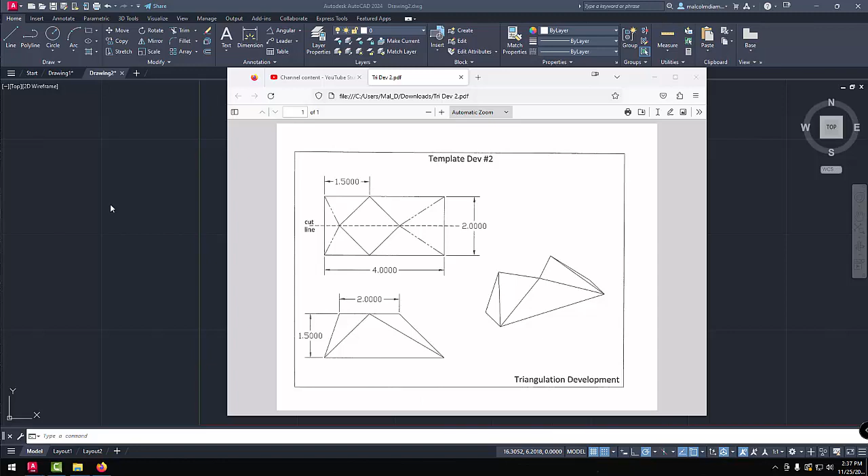Hi, and welcome to template development number 2 in Triangulation Development. As you can see on screen, this one's a little bit more difficult with an offset center. We've got the same half pattern design, and if I just move this to one side, we can start with the drawing.

First things first, we have a base which is 2 inches by 4 inches, so we could start with that. If we click on the rectangle, we come down on screen and left click. It's 4 inches by 2 inches, so it's at 4,2 and enter, and that's the start of our pattern.

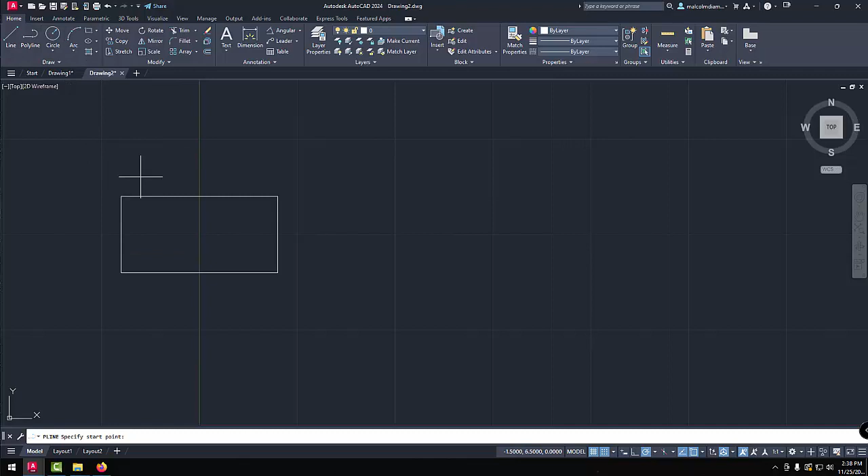Flicking the drawing back on screen for a second, we have an offset of 1.5 inches to start this square. What I'm going to do is bring a polyline up, come to this corner, then go 1, 2, 3 across. At that point, if I click it, because the end point is on, it's going to grab that corner, so I'll do NEA and enter, which gives me the near point right where I'm at, 1.5 inches in from the left hand side. That's our first start.

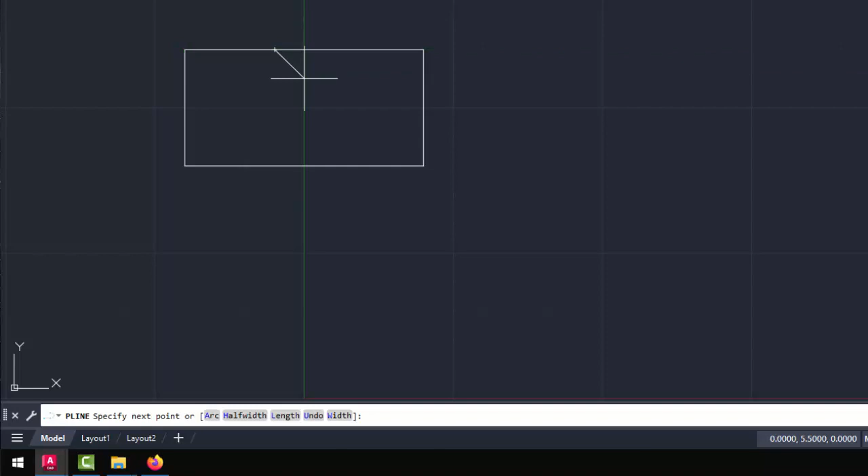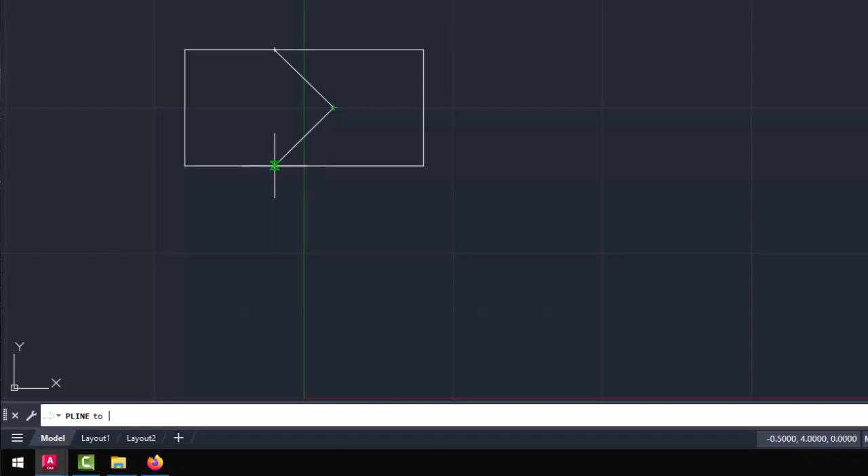Now we're going to trace around this by going 1 inch across and 1 inch down, click, 1 inch down and 1 inch back, click. Then we'll do an NEA, then enter, then click, 1 inch up and 1 inch back, and click, then we can do a C for close, C and enter, and that gives us our pattern.

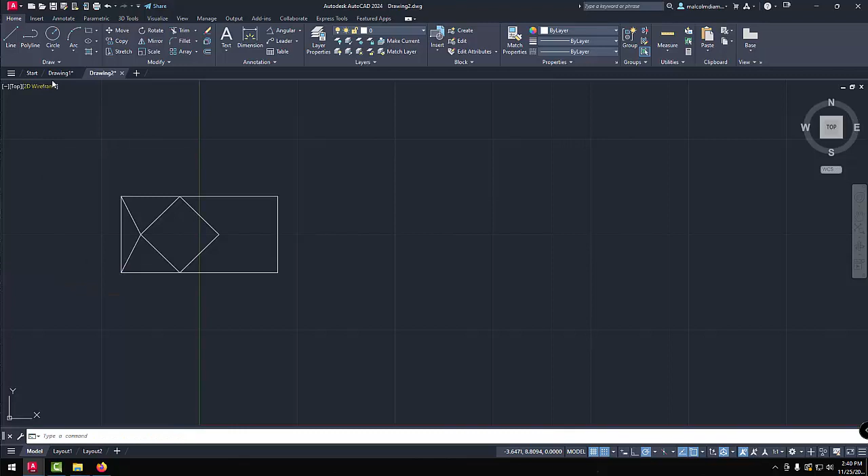The only other thing to put on there are the bend lines and the cut line, and you can see that a number of these are drawn with center lines. I'm just going to draw them all as solid lines, with the center line being the only one that's actually a center line or hidden line. While I'm filling in the rest, which is pretty simple, just go by the drawing and attach as shown. Basically you're looking at 2 V's, one at either end.

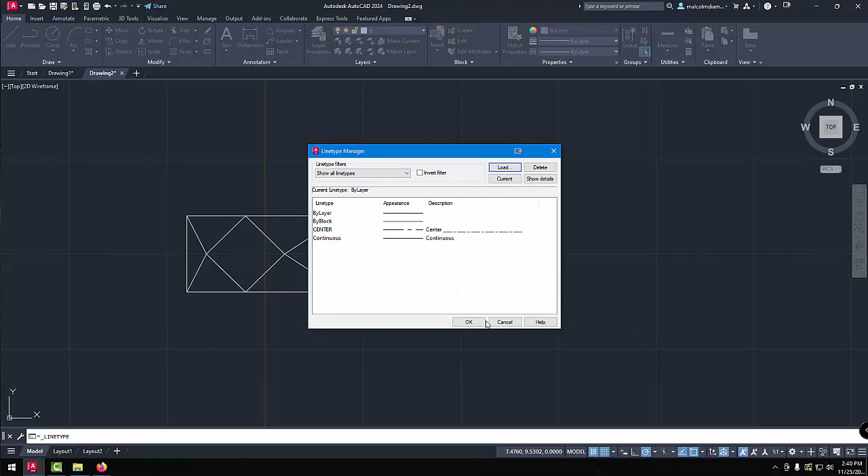Now we can get back to actually doing the center line, which, like we did before, we need to open up our line types. We don't have a center line, so we go to other, we go to load, then we can pull up our center line right there, and OK, and OK. Now we just need to pick our center line from our 4 options.

Grab a polyline, come down on screen, and split that pattern into 2. I'll just move it one out. There we go. And that gives us our shape, and we're almost ready to go. We just have to do the front view now.

As far as the front view, the easiest way to look at this, I'll just put the drawing back on screen, is we've got a 1.5 inch height, a 4 inch base, a 1.5 inch height, we have a 1/2 inch inset, and then it's 2 inches across the top. And in the center at the top, we just put the bend lines on.

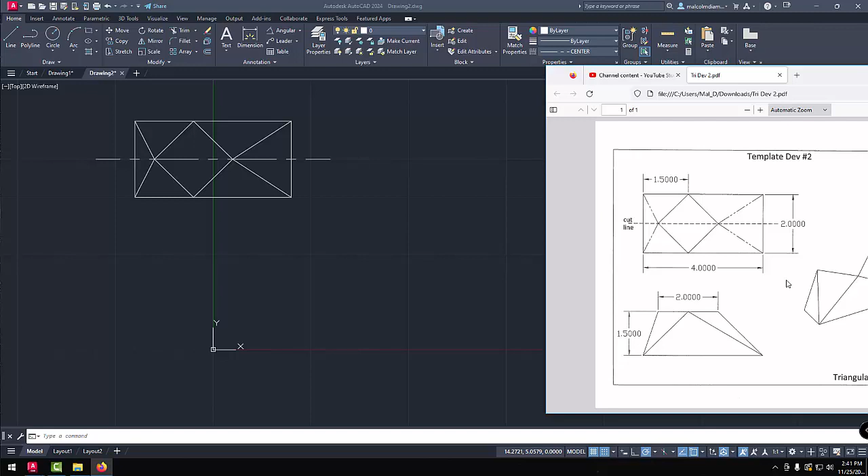If I just move it a little bit further on, you can see what I'm saying. We have this prismatic side here, the edge side, which is the half pattern sides on either end. But yeah, we're basically ready to go.

Now the way that I would draw this is the 4 inch line first. I'm just going to change my line back to a solid line, so by layer to a solid line. Hit the polyline command, come onto this corner here, move that one straight down, and left click. Then move it across to the right and enter 4, then enter, and that will give us our 4 inch line.

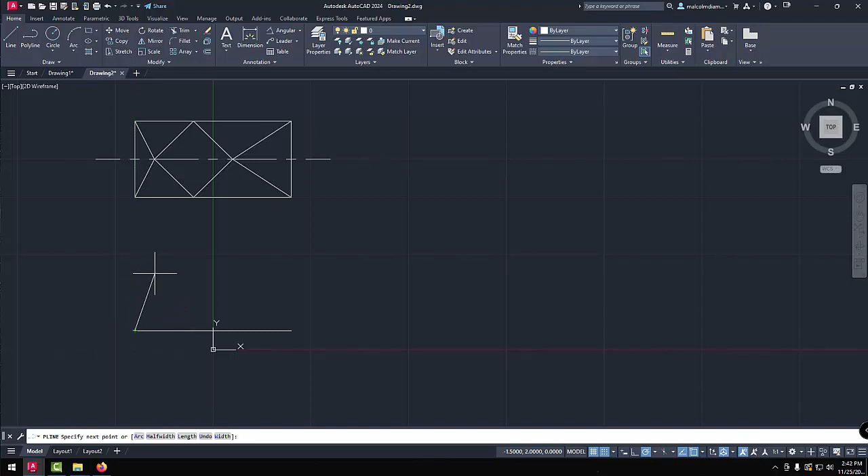I'll end it at that point because I'm going to pick up another polyline from that point, go up our 1.5 inches and in 1/2 inch and click, and then come across 2 inches and click, and then close it down to the other end like so.

The last thing to do is put these two edges on. We have an edge here which goes down to the corner, so we can take that polyline from that point and go to a NEA, enter, to a near point there, and to the end of that line there.

So pulling the picture back on screen, you can see that we've got exactly as drawn there, with the exception that we've got break lines except for solid lines, but everything else is as drawn.

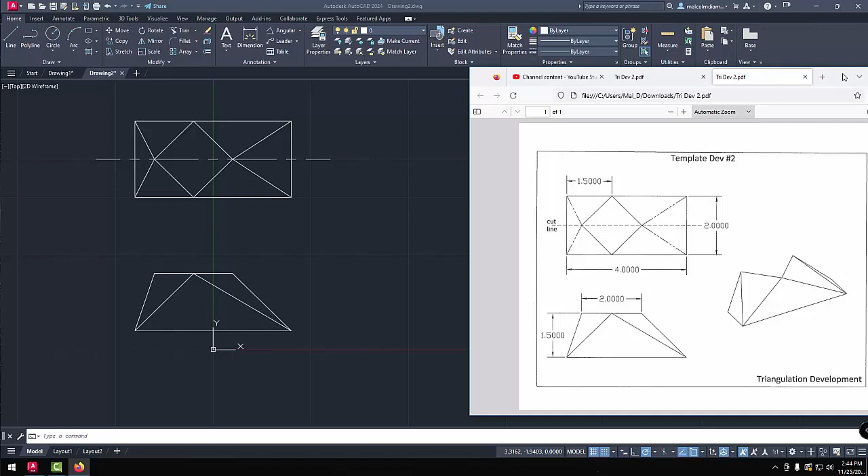Now, before we start doing our development, we still have the true length line graph to put on. I'm just going to go to polyline, coming down to the true height, that's all we've got on this one, coming across and click, coming down the 1.5 inch and click, and then moving this out. Because it's a little bit longer on some of the parts, I might go to 4 inches on that. Right click and enter. Now we're ready to go.

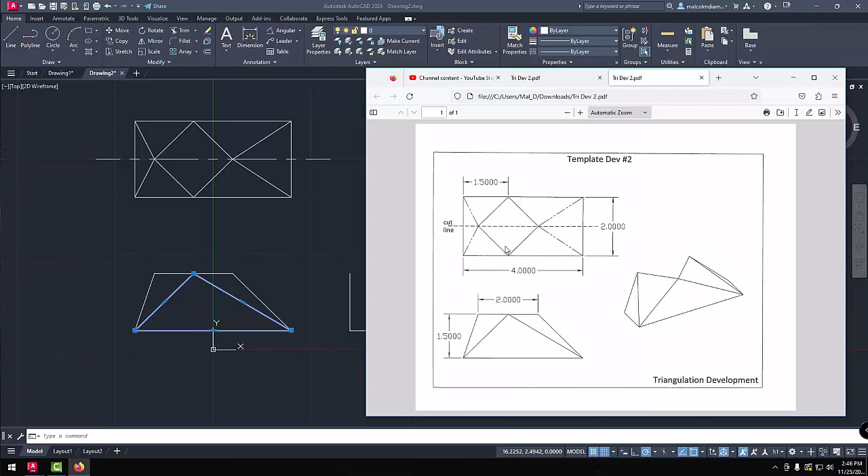Now the first thing you should know is that because this side here is flat to view, we can literally take that shape off. This shape here is flat to view, so we can take that one off. And if you can't see that, let me know and I'll explain it a little bit more. But if you look at the picture again, if I just drag that one on, that side there is dead flat, and looking at it from the front, you can see that it's a flattish shape, but looking at it from the side will show us that.

So with these lines selected, I'm going to do a copy. I'll hit copy, come down to this edge and copy that as the start of our pattern. That was the easiest one yet.

With that said, we have the first part of our pattern. Now we need to look at where these points are. That one is obviously there, so on that side we're looking at getting this point. The second line will be this edge here going up again to that point, so we can triangulate that third point, since we're looking at a triangular shape, not something with two sides or two projected points like last time.

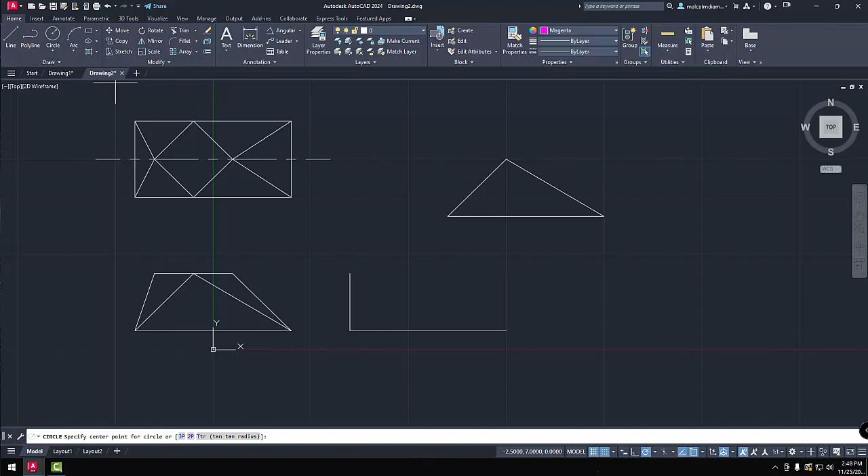I'm going to change my color, maybe a magenta again. Then grab a circle, come onto screen down to the point I need, stretch it across to find that point, and click.

Now I need to copy this circle down to the base of our true length line, which is there. I then draw our true length line in, from there to the point at which it intersects, which is there.

Now I'm going to grab a circle to get the radius of our true length line, right there, and copy that large circle from its center point to the point at which I measured it, and that is the top. Don't get mistaken and put it on the bottom. It is the top.

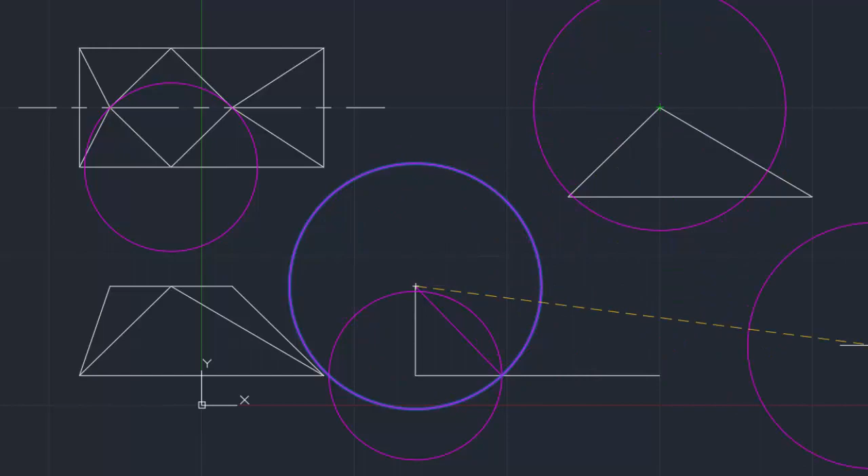Now looking at that, you can see where the center of that circle is. It is from the top point, not the lower left or lower right. Okay, second line, so I'm going to change color again. Again we're on the slopey edge, and I'll take my light blue one a second time.

I'm going to come up to my circle command and measure this line from there to there. I'll zoom in on that for a second. That's the point we're looking at whilst developing this bent edge in.

That one developed from the lower left hand side, that's there. It's going to give us a point somewhere here. But because it's a bent over line, one that's not dead straight to us, we're going to develop it.

So we're going to copy this line from its midpoint, or from the center point, down to the bottom line. Then we're going to draw our polyline from the true height to the point of intersection on the radius of that circle. And then finish it off by drawing our true circle down to the end of that line.

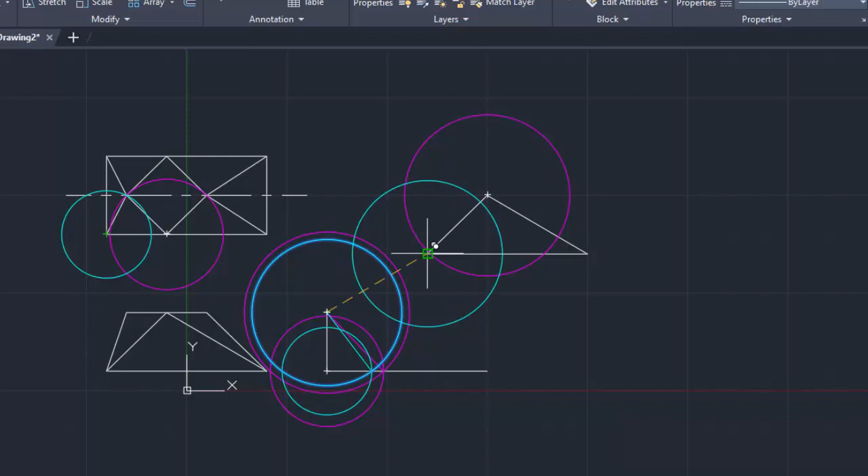Now we copy it, so copy the circle we just developed from its center point. This time, because we measured from that bottom corner, we're going to drop it on the bottom corner. And you can see now where that pattern develops.

I'm going to change that back to bilayer line, which is white. Grab a polyline, come down to this lower edge, come up to the point of intersection here, and then into the top of that line. That's our first one done.

Now, all of our development so far has been over on the left hand side. It's not that busy yet, so we need to do this right hand one, and I'm not going to bother putting it on another layer quite yet.

What I am going to do, however, as we measure this next one, which is going to be over to there and from the bottom over to there, is change my color and take a yellow, then come up to the circle command.

We could effectively use this pink line because it's touching both those points and we did develop it out. We could use that as it is to find the other point. So I'm now going to go to circle and go from this corner here to that point there. Then I'm going to copy